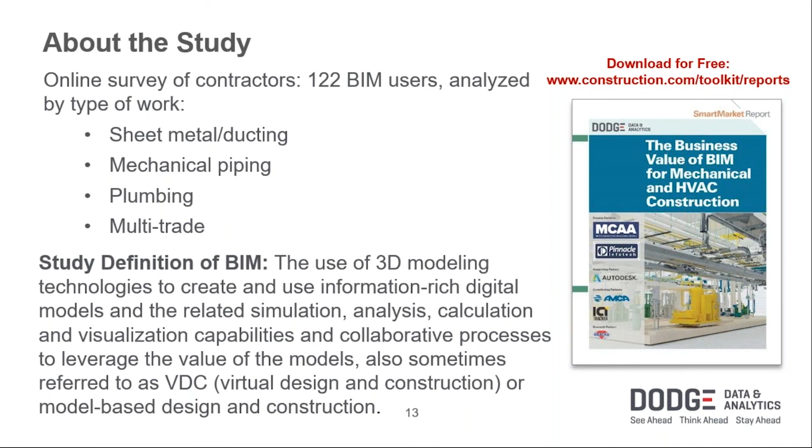We divided the findings into four different types of contractors: sheet metal ducting contractors, mechanical piping, plumbing, and multi-trade. You'll see as I go through the presentation, nearly all the data is presented based on their specific responses. I'm not going to read through the study's definition of BIM, but I wanted to present it on the slide because I wanted you to know we kept it deliberately broad. We were very interested in how they're using BIM, not just how they're modeling, but how they're using models given to them by others.

The study also features an advisory council and a set of interviews with experts—real people who have been deeply engaged with BIM for years, who shared their insights with us. There's a list of really interesting feature articles; BIM standards is a really hot issue right now for mechanical contractors, and there's several other things and a couple of case studies too. But let's dive into the findings.

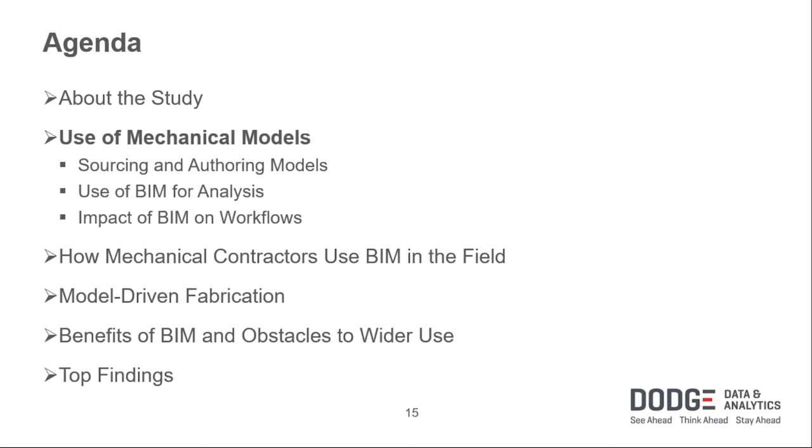So first we're going to look at how these mechanical contractors and HVAC contractors are using mechanical models. From our advisory board interviews, the senior director at Southland says, to a certain extent, you don't really have a choice in adopting BIM if you really want to collaborate well with other team members. I think that really sets the stage for the degree of use of BIM that we saw.

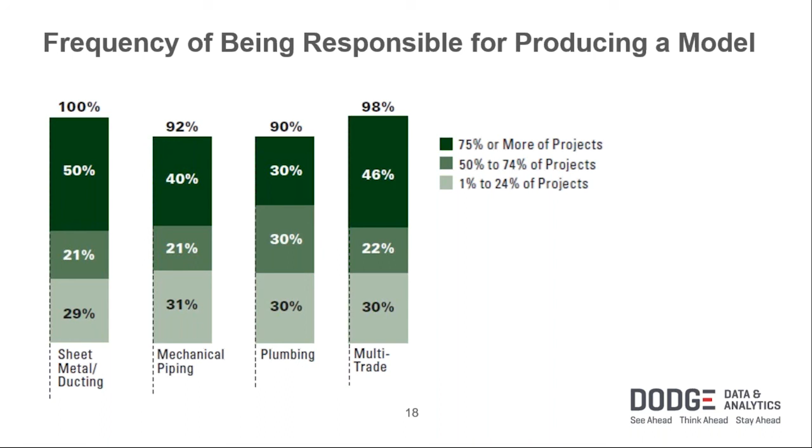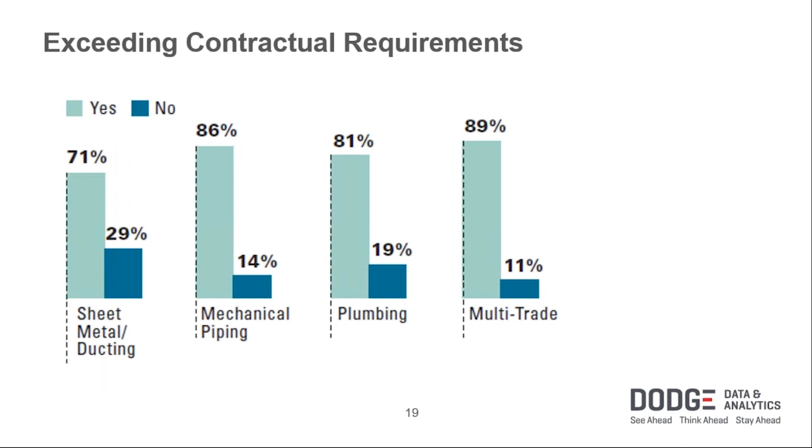Nearly all contractors are responsible for producing a model on at least some of their projects. There's a really strong emphasis among sheet metal, ducting contractors, and multi-trade contractors on having that responsibility, with about half reporting they do so on 75% or more of their projects. It's very common for them to be responsible for producing a model, and most report exceeding contractual requirements when they do.

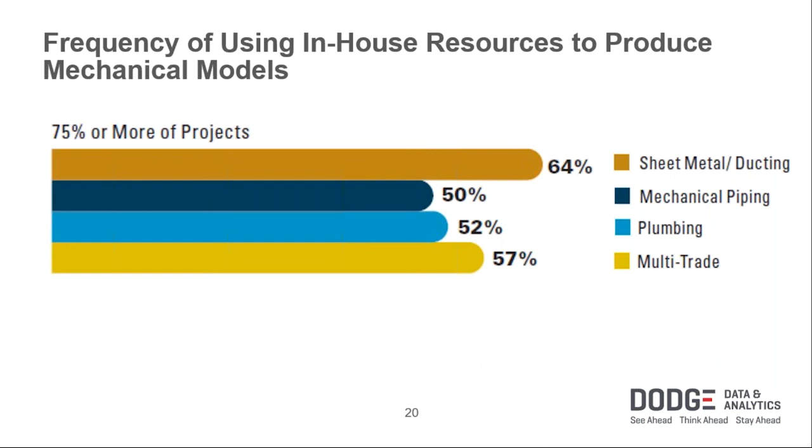But they don't always produce the model, and even when they do, it's very common for them to use in-house resources. Clearly most of these firms have in-house resources to produce models. On 75% or more of their projects, 50% or more are producing the model in-house, but there's still a notable percentage that are producing it out.

One thing that really makes a difference in whether they're producing the model themselves is the size of the firm. If it's a firm with 50 million or more in revenue, 60% or more said yes, we are producing models on 75% or more of our projects. But if you're a small firm with less than $10 million in revenue, it's much lower, only 23% say they're producing models that frequently.

So who are they going to when they're not producing their own models? We saw a wide variation based on the type of contractor. Sheet metal and ducting contractors are really getting models from engineering firms—that's their main source if they're not producing them themselves. Mechanical piping contractors are going to third-party BIM service providers. Plumbers, and to a lesser degree multi-trade contractors, really aren't as frequently going to anyone to get their models.

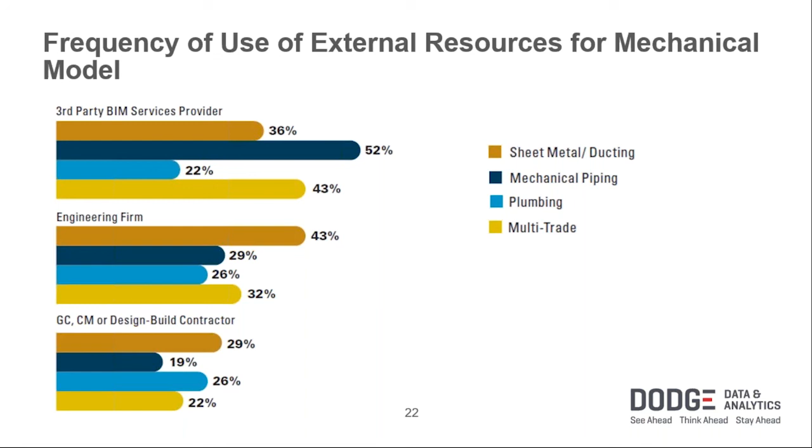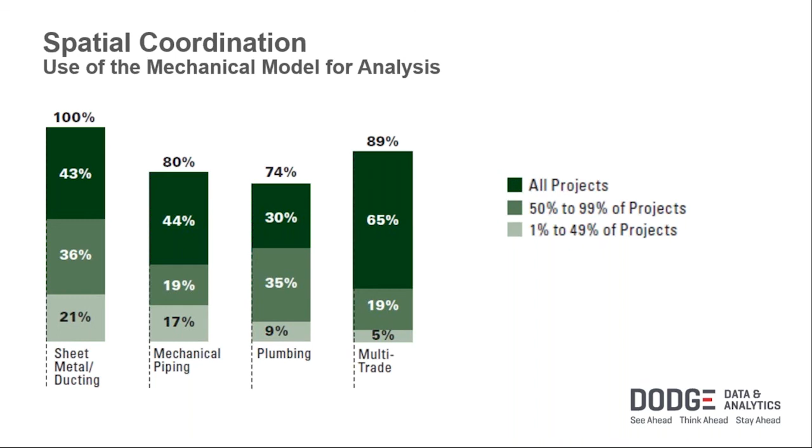So it's very commonly used. The president of US Engineering spoke to this—that it isn't even something they're now masters of, but that they still see such potential for this to grow in the future. They believe artificial intelligence will become a real consideration, where the first pass of coordination will be done by the machine instead of by an individual. So really an eye to the future there.

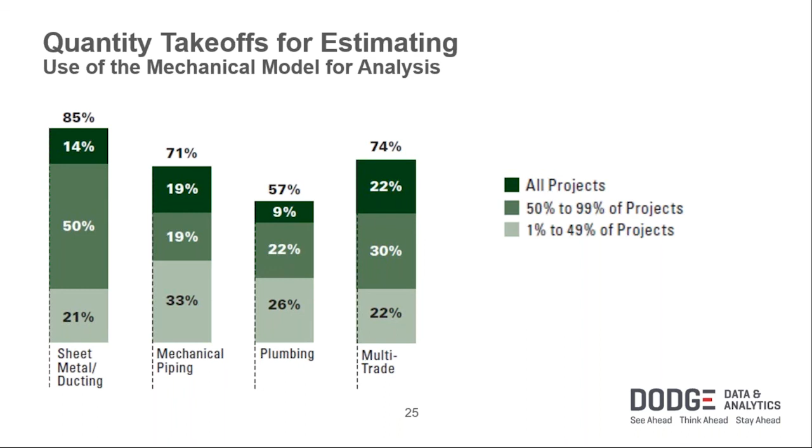The next area of analysis is quantity takeoffs for estimating. Again we see high percentages at the top of the bars, especially for sheet metal and ducting contractors, mechanical piping and multi-trade contractors—most are doing quantity takeoffs on at least some of their projects. However, the percentage doing it on all of their projects, the dark green section, is much lower. So this is not as well established as the previous analysis type.

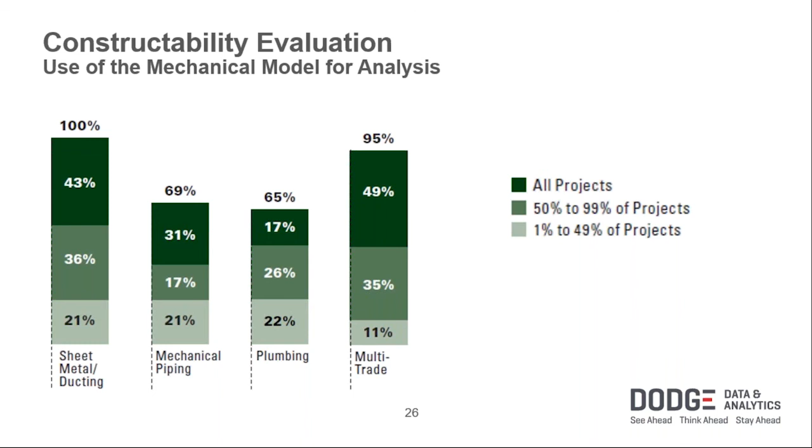The next type of analysis is constructability analysis. Again it's exceedingly common for sheet metal ducting contractors and multi-trade contractors to do this on at least some of their projects—nearly all report that they do, and about half do it on all of their projects. It's less common among mechanical piping and plumbing contractors, though about two-thirds are still at least familiar and using it on some projects. Clearly this is something with real expertise in the industry.

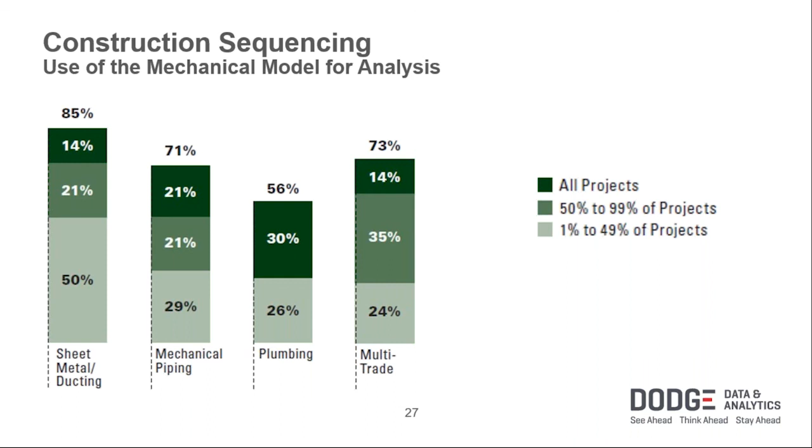Construction sequencing shows a slightly different pattern. Sheet metal contractors are again one of the highest users, with 85% using it on at least some of their projects. Mechanical piping and multi-trade contractors are both above 70%. Plumbing contractors far less frequently use construction sequencing—unless you look at the intensity of use. For sheet metal, mechanical piping, or multi-trade contractors, it's not that common to use it on all of their projects. But look at the plumbers—more than half of those doing it at all are doing it on all of their projects.

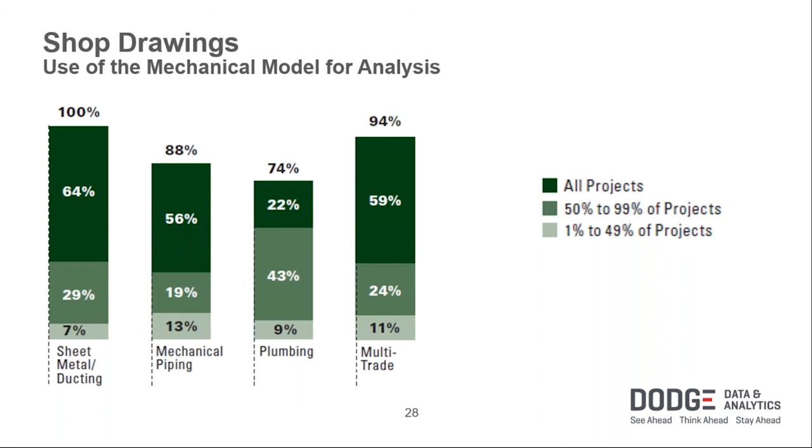Well over half of the sheet metal ducting, mechanical piping, and multi-trade contractors are doing shop drawings on all of their projects. As the Vice President of Support Operations at Brandt says, engineers create contract drawings, but BIM creates shop drawings.

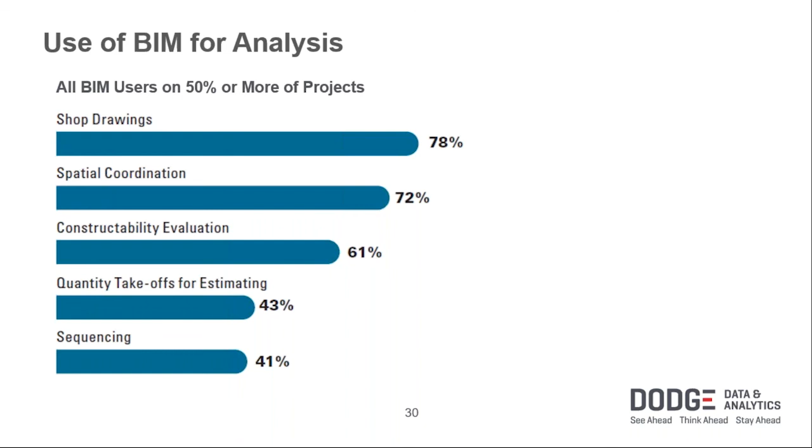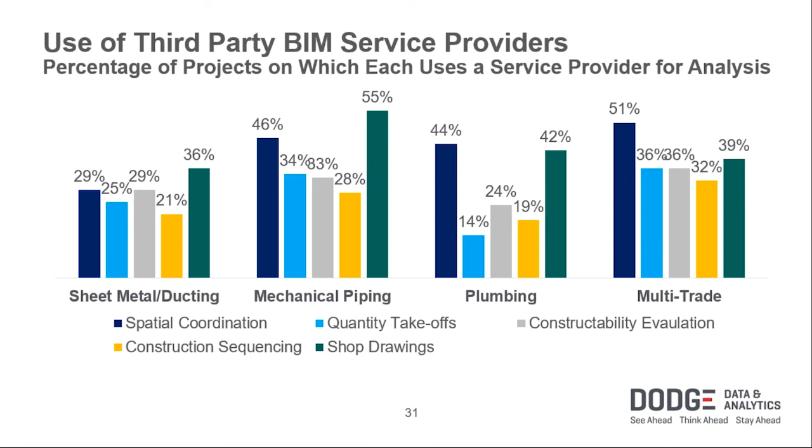We also wanted to know, when you don't do this in-house, do you use third-party BIM service providers to do any of these functions? It's pretty clear that mechanical piping contractors, plumbers, and multi-trade contractors are using third-party BIM service providers relatively frequently for spatial coordination and shop drawing. We see less use of third-party BIM service providers in general for sheet metal and ducting contractors.

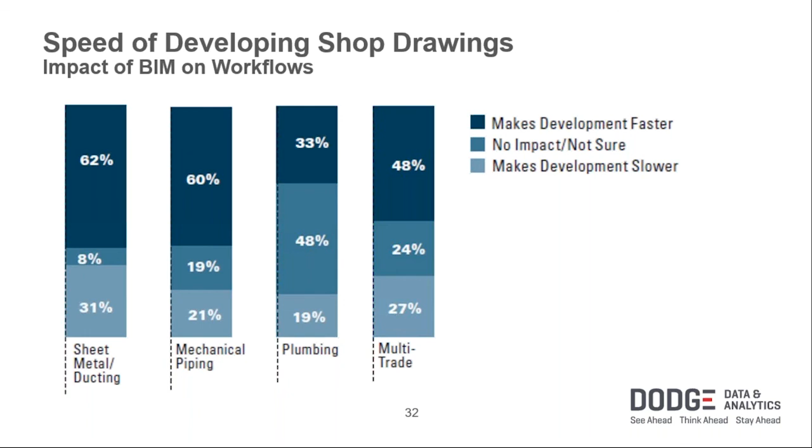So what is the impact of doing all of this? What is the impact of BIM on workflows? First, there's the question of whether it makes the development of shop drawings actually faster. For the most part, most agree, especially among sheet metal, ducting, and mechanical piping contractors, that it does make it faster, although there's still a percentage who feel it makes development slower. 31% of the sheet metal contractors feel that way. So it's a little bit of a split finding on that one.

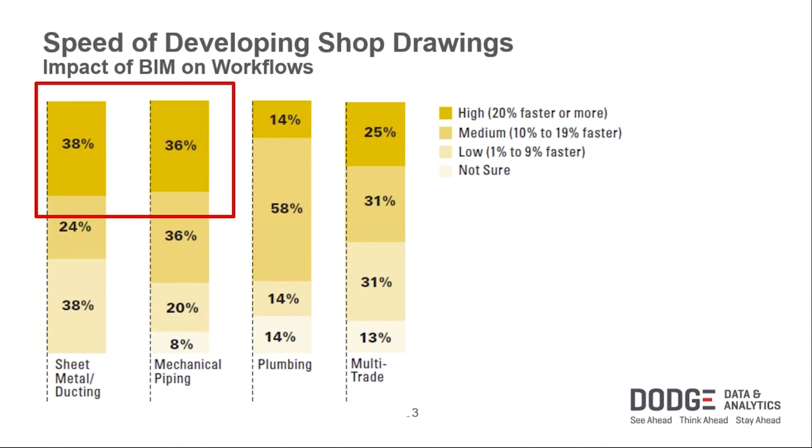Among those who do say it's faster, it's really the sheet metal ducting and mechanical piping contractors that see the advantage, with well over 30% reporting it's 20% faster or more. That has a pretty major impact on their projects.

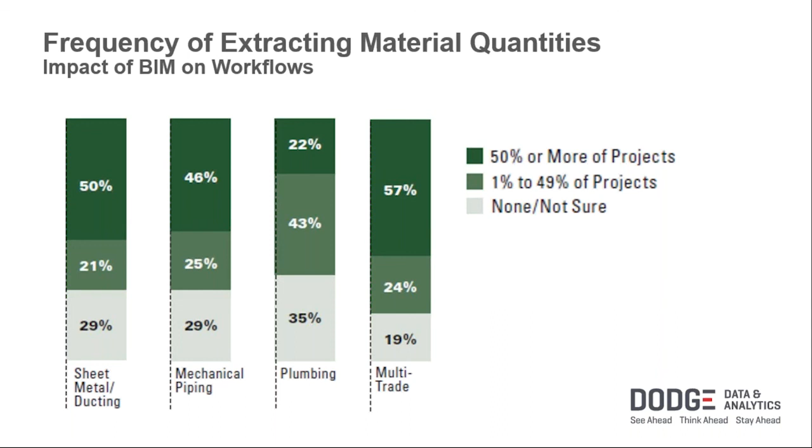We also asked about the frequency with which they extract material quantities on projects. You can see the plumbing contractors are doing it a little less frequently than the sheet metal, ducting, mechanical piping, and multi-trade contractors, where about half say they're doing it on 50% or more of their projects.

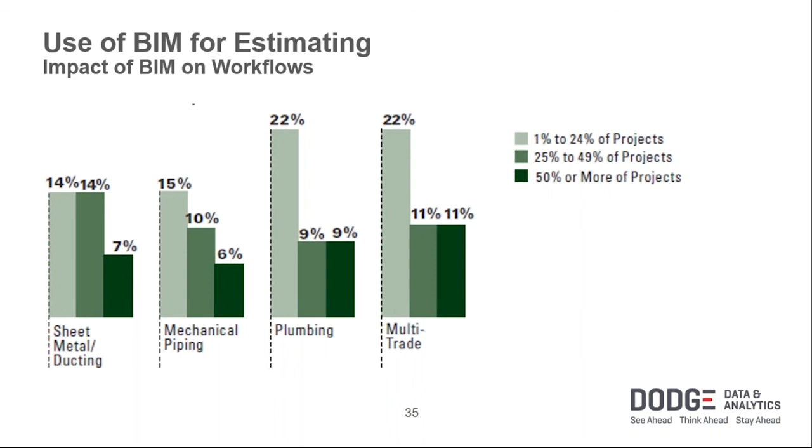One area that's definitely emerging is the use of BIM for estimating. Less than half report doing it on any of their projects, and the vast majority of those using it are doing it on less than a quarter of their projects. This is still an area where mechanical and HVAC contractors are trying to figure things out.

One of our advisory council members, the vice president for corporate technology at Hill Group, really had that estimating piece he could talk about. He pointed out they were able to integrate their estimating software with their BIM technologies, so estimating, fabrication, and BIM are all part of one software system. They have multiple opportunities because of this to round trip information, so they can use it for the estimate, but then through the job closeout as well. The value of this is really high once they're able to get everything to work together.

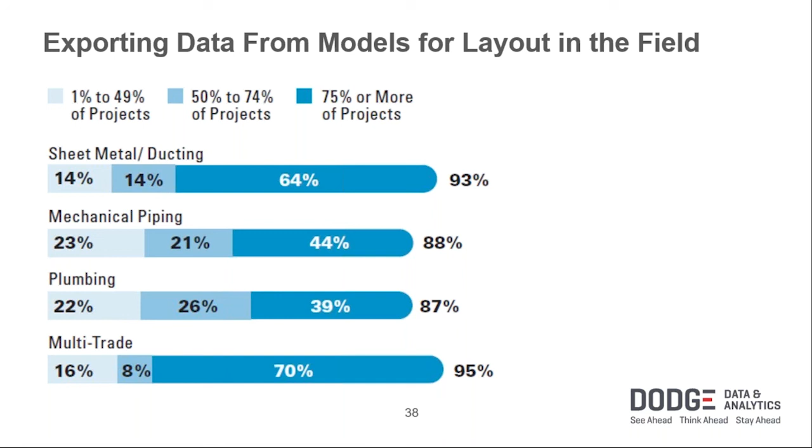That's their use before construction starts. How are they actually using BIM in the field? We see high percentages in terms of anyone using it to export data from models for layout in the field. The larger part of the bars, especially for sheet metal and ducting and multi-trade contractors, is those doing it on 75% or more of their projects. We also see pretty wide use of BIM robotic total stations for layout in the field.

What is the impact of using BIM for layout? You can see why we get such high usage when nearly all of them report improved productivity in the layout process. The vast majority, except for the plumbing contractors, see it increasing the speed, and even over 50% of those do so, along with increasing accuracy of location, also very common.

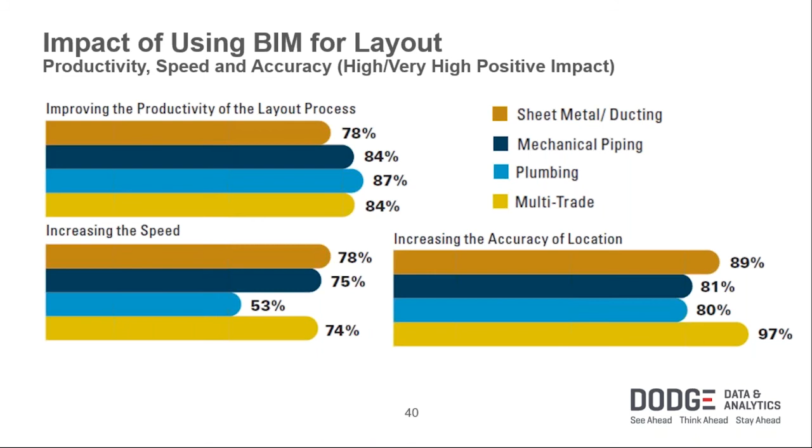I want to point out that this is a rating question, where they were asked to rate impact from no impact through low, moderate, high, and very high. All the percentages on this slide are just those who reported a high or very high positive impact, not just the percentage seeing improved productivity, speed, or accuracy generally. So it's not surprising we see such a large pickup on that. We do see, on the high and very high impacts, slightly less impact, but still notable impact on RFIs.

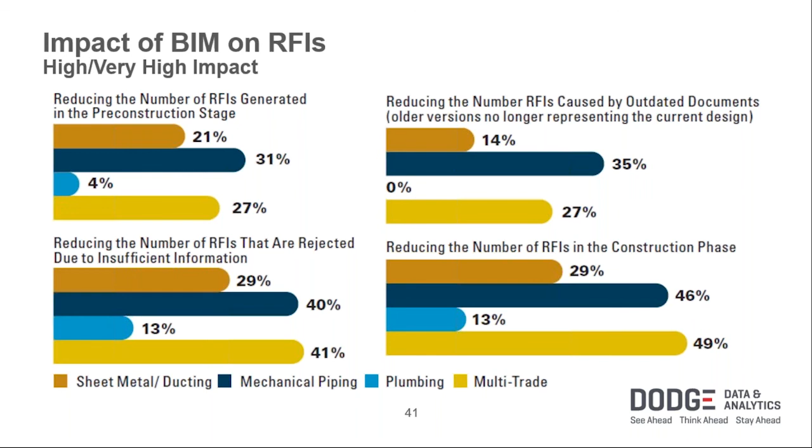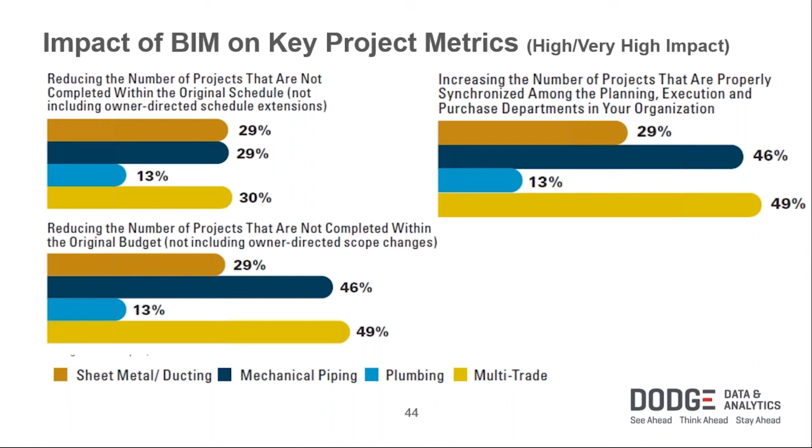And again, they're the ones who are also seeing a pretty high impact from their use of BIM on increasing the number of projects that are properly synchronized among the planning, execution, and purchase departments in their organizations.

And the group BIM manager at AG Coombs really talked a lot about how they use BIM on site, and they were doing some really interesting things. They were using a lot of different tools and apps to take photos on site, but the key advantage is that idea of site capture with BIM.

They do a lot of 3D point cloud scans. It reduces manual time while it's on site, and it provides great accuracy, but it also validates what they built. So they've really been able to use it, not just at the beginning, but all the way through, to really validate where they are at and maintain budget in a very specific way.

Now when we spoke to the mechanical contractors, both in the advisory council and in the survey, as you'll soon see, one of the biggest advantages that they find from using BIM is model-driven fabrication. You'll see that when we look at how frequently the mechanical contractors are using prefabrication, it really is a big focus for them. And the senior vice president of the Brandt companies really felt that one of the major advantages of BIM is that a proper BIM process generates an opportunity to allow planned prefabrication to reduce on-site risk.

And we're going to get into details about exactly what the contractors see when they use BIM to prefabricate mechanical assemblies. But first, before we look at the benefits, let's look at how frequently it happens.

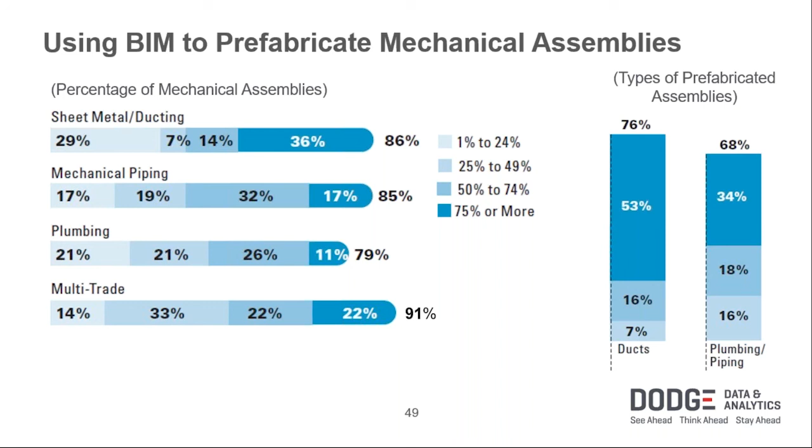And the most commonly reported types of prefabricated assemblies were ducts and plumbing and piping.

So we're going to go through the benefits now of prefabrication, and there's a lot of data on each of these slides, so I wanted to walk you through exactly what the data means before we go through and do the individual reporting. The first thing is, for each benefit, I'm going to present you, up in bold at the top, an average percentage reporting improvement.

But then what we really get down to brass tacks is, among those who said better or much better, we ask, okay, did you see an impact of 10% or more? They rated their impacts across a bunch of different percentages, but we're just going to focus on those who saw impacts of 10% or more, because that's where it really starts making a huge difference, and we'll see which ones are benefiting the most.

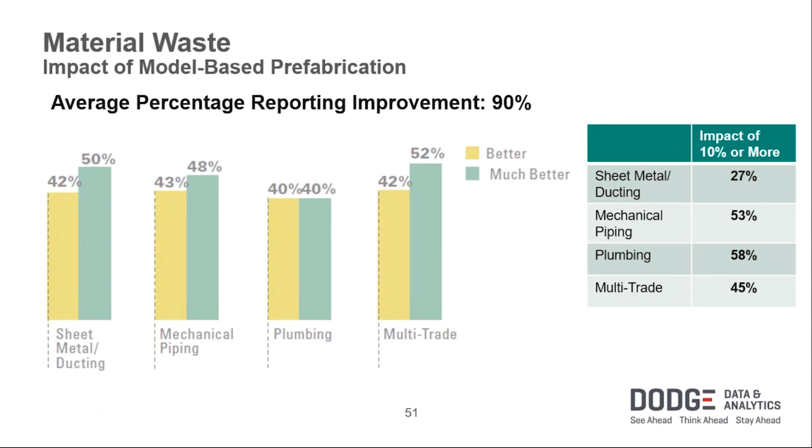So the first benefit we're looking at for model-based prefabrication is material waste, and we see 90% report that they see this benefit. That 90% say, yeah, my projects, when I use model-based prefabrication, I reduce waste. And when it comes to who's seeing the impact of 10% or more on waste, the two leaders are definitely the plumbing contractors and the mechanical piping contractors, who are well over 50% reporting that impact. The multi-trade contractors are right behind them, with nearly half reporting the same level of impact. It's only the sheet metal ducting contractors that are less frequently experiencing impacts at that level.

And the vice president of corporate technology for Hill Group said, look, we've seen jobs where you're driving over 60% of the total mechanical labor on the job into the prefabrication shops based on effort from the BIM process. So, really strong endorsement of that finding.

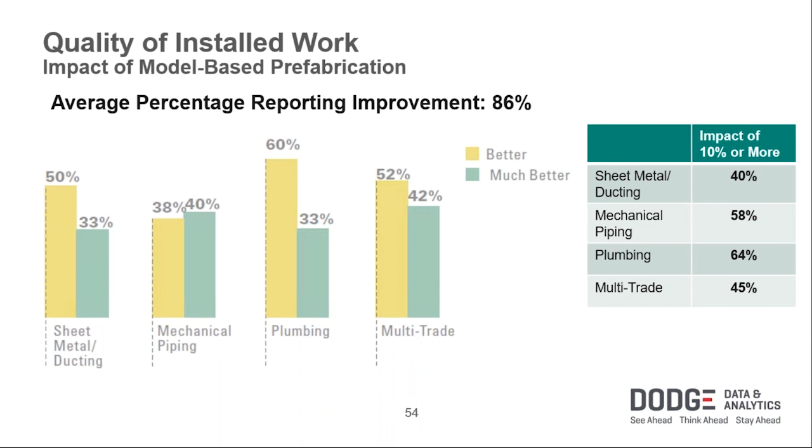Next, we're going to look at another key project indicator, which is the quality of installed work. And here, still 86%, the vast majority say, yes, we get better quality when we use model-based prefabrication. 64% of the plumbing contractors report improvements in quality of 10% or more, 58% of the mechanical contractors, and then 40% or more of the sheet metal ducting and multi-trade contractors. So again, a pretty big impact overall.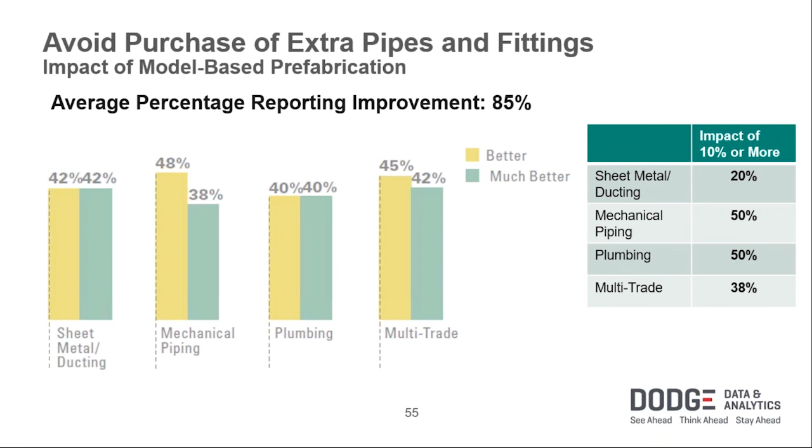We go from something as nebulous and big as quality to something extremely specific: avoiding the purchase of extra pipes and fittings. 85% of the mechanical contractor and HVAC contractors who participated in the survey saw improvements in their ability to avoid purchase of extra pipes and fittings from using model-based prefabrication - much more precise understanding of what they need. And half of the mechanical piping and plumbing contractors saw those purchases go down by 10% or more.

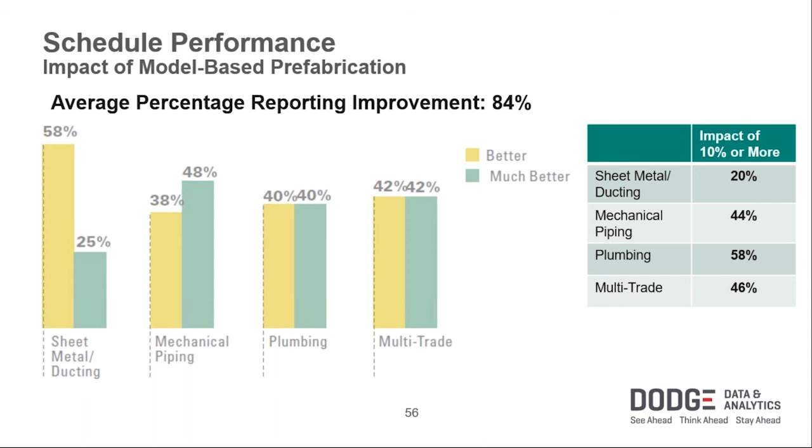Schedule performance, we see 84% - the sheet metal contractors are big on the better, but they actually average out to the same as everyone else when you average both better and much better together. 84% report schedule improvements when they use prefabrication. Plumbers, the plumbing contractors, are the big beneficiaries, but mechanical piping and multi-trade contractors also frequently report high impacts from that.

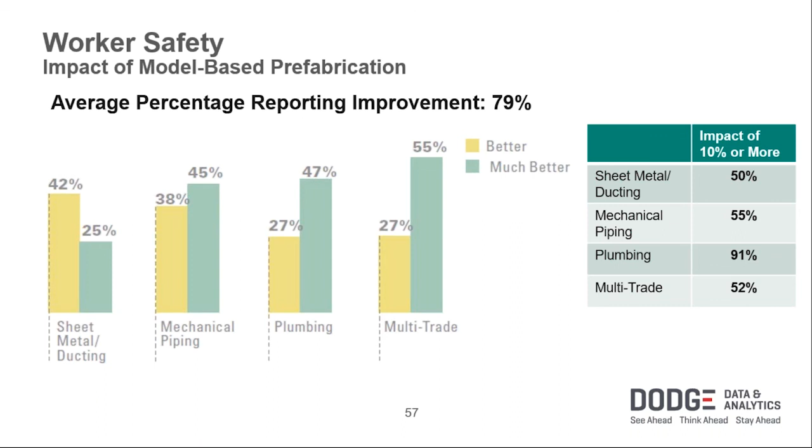And then worker safety is the next one. Now, we're already, what, six benefits in, and we still have 79% saying yes, this is much better when we use prefabrication. 91% of the plumbing contractors say they see an impact on safety of 10% or more when they prefabricate, when they allow people to work in a factory setting rather than have to stick-build these things on the project. And over 50% of everyone else reports the same. So while there's a slightly lower percentage who report improvements in worker safety, once they do, they tend to more often than not report relatively big impacts.

Then finally, site logistics cost is our final one. Still a high percentage, 71% who see an improvement. And we again see the plumbing contractors being the biggest beneficiaries of this.

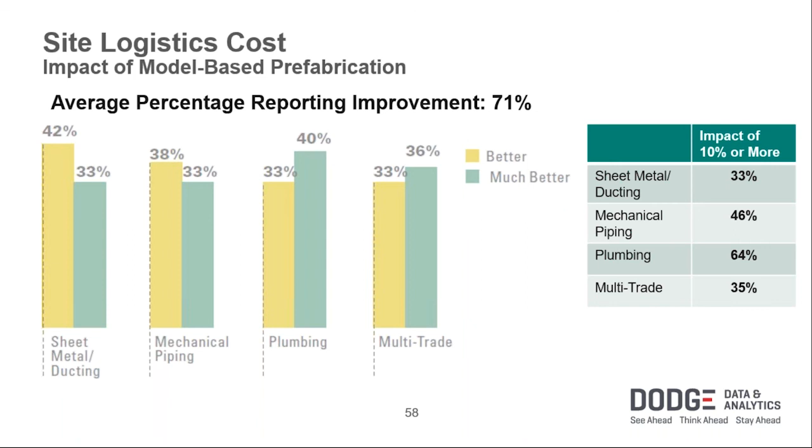All right, so that's just the benefits of prefabrication. But let's dive into the broader benefits of BIM and also look at the obstacles to wider use.

Now let's talk about benefits and obstacles reported by the mechanical contractors. For benefits and obstacles, we took the same approach. We had a lot of benefits and a lot of obstacles that we wanted to ask about, so in each case we divided it up into two separate lists. For benefits, it was project-related benefits and company-related benefits. Project-related benefits include everything like improved quality, improved schedule performance, better collaboration. And company-related benefits include everything like seeing improved safety performance, increased profitability, better utilization of resources, and enhancing their industry reputations.

Now, from each of these lists, when we look at the findings, it's important that you understand they were not asked what they are experiencing, or to rate the degree to which they were experiencing them.

We really wanted to hone in on the benefits and the obstacles that make a difference to these contractors. For each of these 2 lists, they were asked to select their top 3, so we could determine the top project-related benefits and the top company-related benefits. We followed the exact same format for obstacles, dividing them into 2 groups. There's so many issues around skills and employees that we made people-related obstacles and training a category of its own, and threw everything else not directly related to manpower and training into the other obstacle category. That includes everything from the cost of hardware and software to lack of BIM support by other team members outside their company to lack of adequate quality BIM content. So those are the obstacles we asked about.

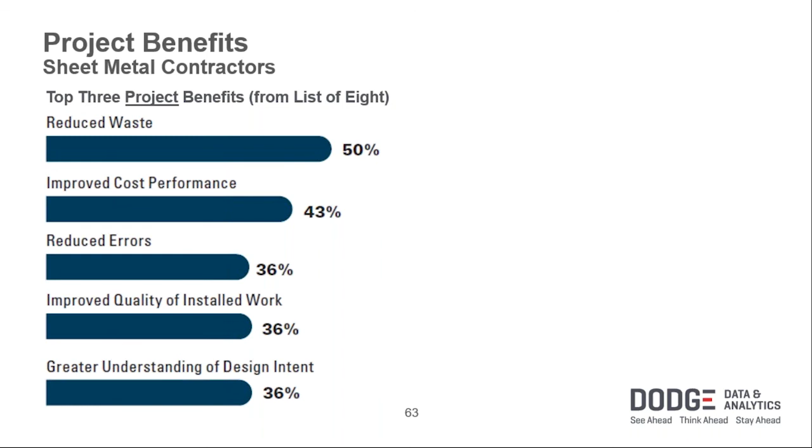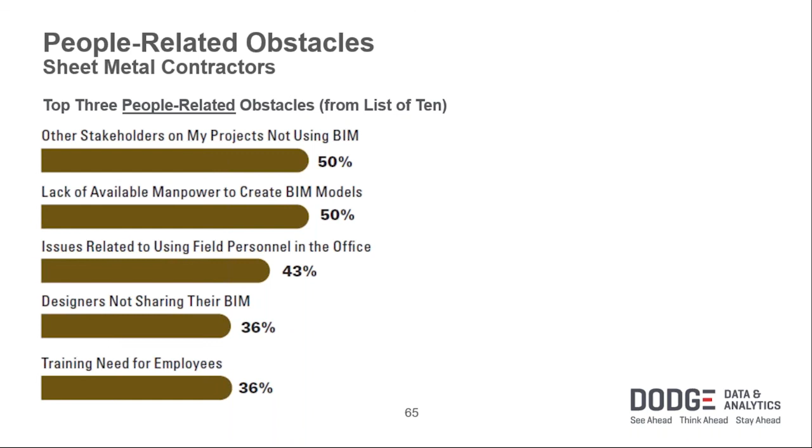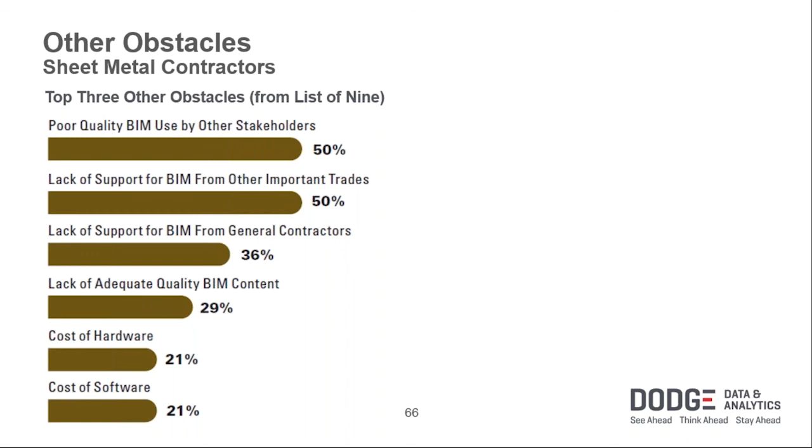When it comes to obstacles for sheet metal contractors, amongst the people-related obstacles, it's other stakeholders on my projects not using BIM and the lack of available manpower to create BIM models. Those are the big challenges they face, most frequently ranked in the top 3. Among the other obstacles, it really is about the lack of BIM support across the project team—they tied for first between poor quality BIM use by other stakeholders and lack of support for BIM from other important trades. There's also a notable percentage pointing to lack of support for BIM from general contractors. So that's the sheet metal contractors.

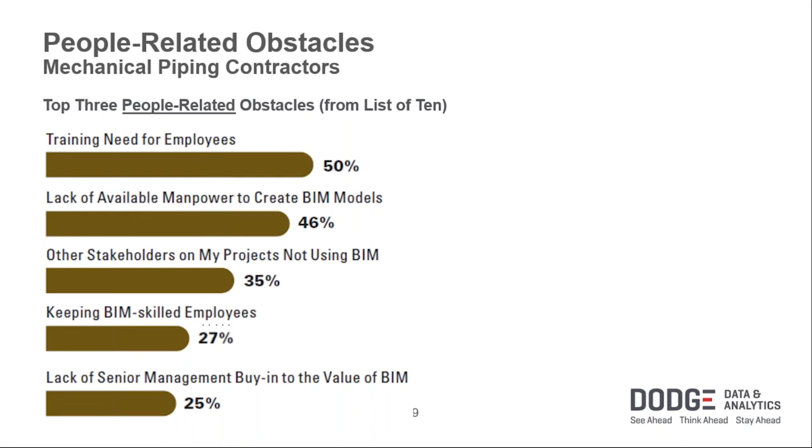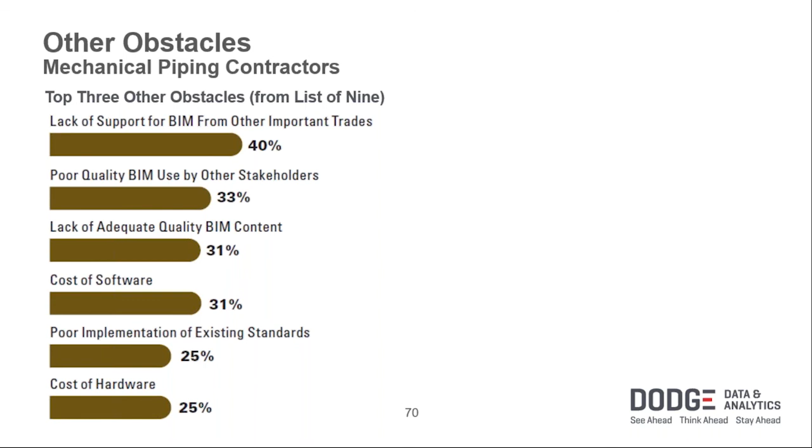When we look at their people-related obstacles, we see training needs for employees and lack of available manpower to create BIM models—it's the challenge of just not having enough people with the skills needed to get BIM users up to the point they need them to be. Those are the big obstacles they face. When it comes to the other obstacles, truthfully none of these percentages are that high. You could say lack of support for BIM from other trades at 40%, but really there's no uniting around a single obstacle or a couple of obstacles.

Let's look at the plumbing contractors next. For them, the biggest project benefit is collaboration between stakeholders. They also see improved quality of installed work and improved cost performance as critical, far more critical than the other benefits—those are the top benefits they're reporting. Again we see labor productivity as one of the top company benefits, and for plumbing contractors it clearly ranks far above the second option, which is enhanced industry reputation.

We also see that same kind of unanimity around people-related obstacles: training needs. Plumbing contractors really find that to be the biggest challenge. Keeping BIM-skilled employees is also a challenge, as is the lack of available manpower to create BIM models—you can see that all ties together. Among the other obstacles, plumbing contractors were the only ones who really pointed to the cost of software as the biggest obstacle.

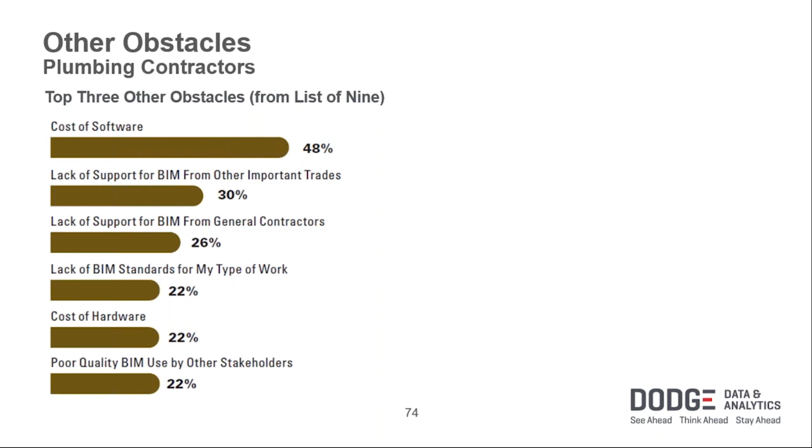Multi-trade contractors, we see that improving the fabrication process for them is by far the number one benefit, although improved schedule is also selected by 49%. So again, very different project benefits.

They experience project benefits very differently between the 4 different types of contractors, but not the company benefits. Increased labor productivity once again emerges at the top. Interestingly, better utilization of resources is also pretty important to multi-trade contractors, something we haven't seen in some of the others.

People-related obstacles, that lack of available manpower to create BIM models and training needs, again emerge at the top. And among the other obstacles, they are another group that are very sensitive to the use of BIM by the other stakeholders on the projects. Poor quality BIM use by other stakeholders, lack of support for BIM from other important trades - those are the 2 top obstacles for them to improve their use of BIM.

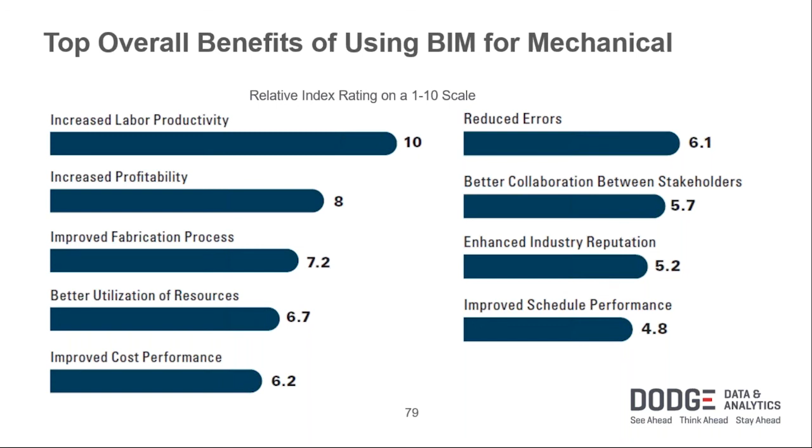But when it comes to what they rank on top, by far increased labor productivity is number 1. We saw that all the way through. What didn't necessarily emerge in the detailed findings, though, is that increased profitability also ranks very high on the overall index. And improving the fabrication process is also a pretty key overall benefit. So we see both the project and the business benefits emerging at the top.

And going back to that productivity, the president of Western Allied really thinks that this productivity issue is going to be critical to them when they see a decline, possibly right now, in the construction market, that they now have a full circle of productivity tracking. As they design something, they can track data from previous projects and figure out how long it takes them to do things, which then feeds into their estimating and really helps them come up with better numbers from the start so that they can keep their profit margins far more steady, because they really know how long it's going to take to do everything. It's a solid, really a true number.

And this process, she thinks, is going to be one of the biggest things going forward that will help them be lean and mean when the economy turns again.

All right, so let's look at the top, using that same kind of index rating of the overall responses. Let's look at what emerges as the top obstacles to using BIM. And it certainly can't be any surprise after going through the detailed findings that training need for employees and lack of available manpower to create BIM models is up at the top, that those are the key things.

But then there's this secondary grouping right under that has to do, again, with the project team members. The lack of support for BIM from other trades, other stakeholders in my project not using BIM, and poor quality BIM use by other stakeholders emerges as a set of core issues for a relatively large percentage out there.

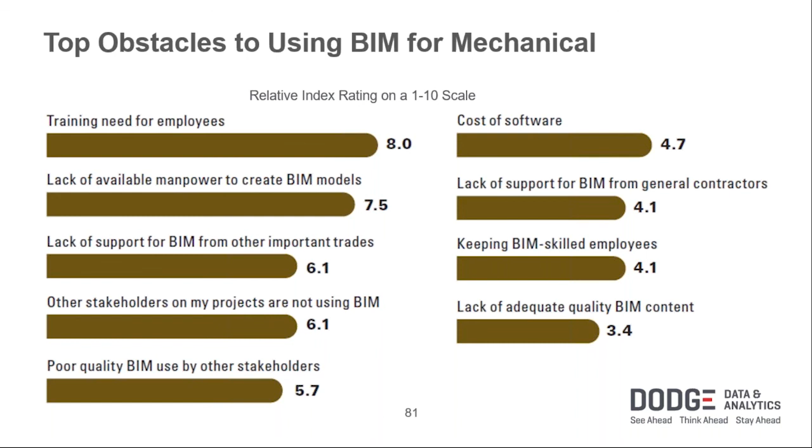And the group managing director, Frieden Ayer, says that often by the time we come on board a project, the model's really progressed, and inevitably the design almost needs to be re-engineered, sometimes redesigned from scratch. Early involvement to him is what really can help them see the benefits of BIM much more strongly.

The managing director of E. Poppleton & Son, this is a UK company, said that they really see some strong disparity between the tier 1 and tier 2 general contractors and what they're doing with BIM, and the void that exists between their capabilities and the capabilities much further down the supply chain. And this is particularly interesting because remember, the UK actually has a mandate about BIM use. So what they're seeing is that even the mandate did not lead to a uniform adoption of BIM, that there's still an advantage that the tier 1 and tier 2 contractors have, and that the rest of the industry is chasing to catch up.

So to wrap up, the top findings are that most mechanical contractors are responsible for producing a mechanical model on their project. 65% do it on half or more of their projects, and only 5% say that they're never responsible for doing so. That mechanical contractors are most frequently using BIM for analysis for shop drawings, spatial coordination, and constructability evaluation. That nearly all of the mechanical and HVAC contractors apply BIM to prefabrication.